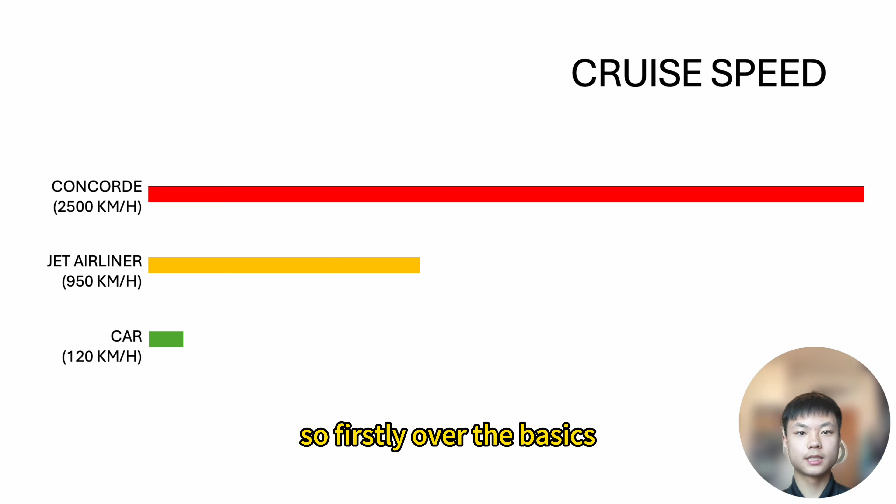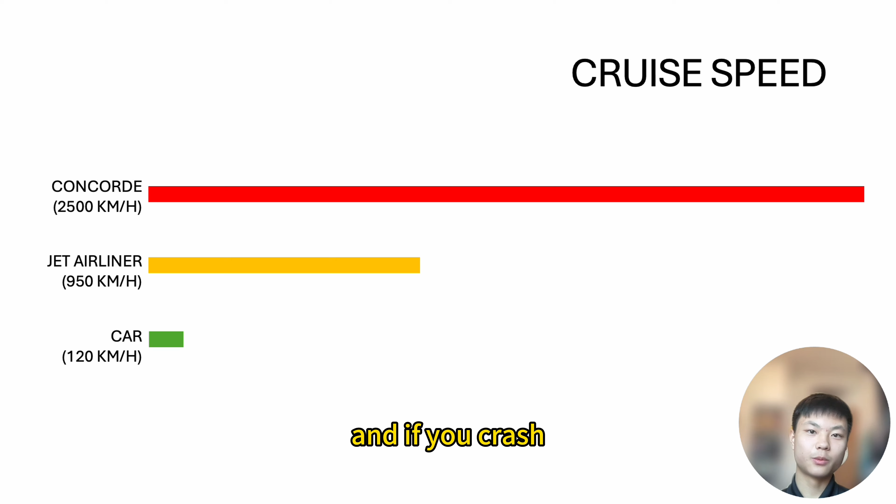So firstly, over the basics, aviation is inherently a bit more risky than ground transport, and that's mainly due to two reasons. First, it's just the speed. With cars, maybe you can go up to 120 kilometers per hour, but with most airliners, you can go up to 950, and for the Concorde, of course, 2500. And this just means significantly more kinetic energy, and if you crash, which is essentially losing all that kinetic energy, it is going to be significantly more catastrophic.

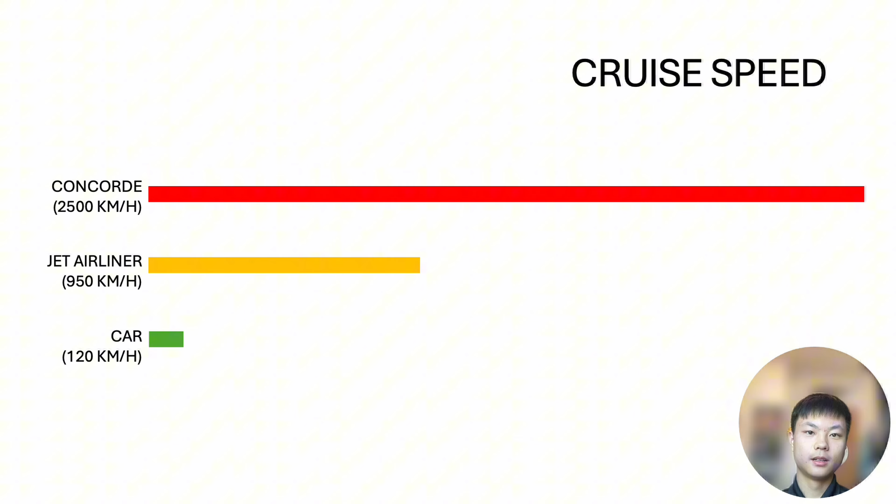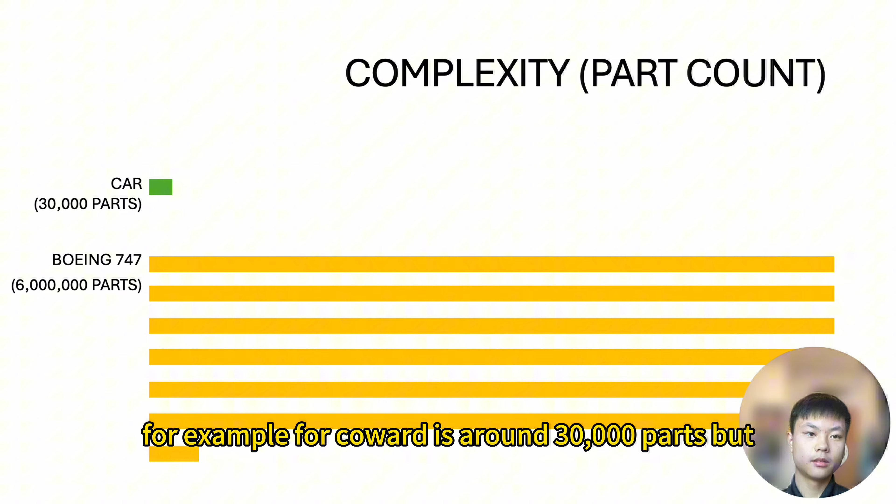Crashing at 120 kilometers per hour is very different from crashing at 950 kilometers per hour. Although this is a very, very big generalization, the idea is the same. At higher speeds, it's a bit more dangerous. And a more important part is the complexity of airliners and aircraft. For example, for a car, there's around 30,000 parts, but for the 747, there's 6 million and even more.

So, even though aviation components are significantly more tested and more redundant compared to car parts and components, there's simply more of them, and that means the potential of failure is significantly higher. That's why there are ETOPS requirements, and also why ETOPS was implemented in the first place, and also MEL, minimum equipment list, in aviation.

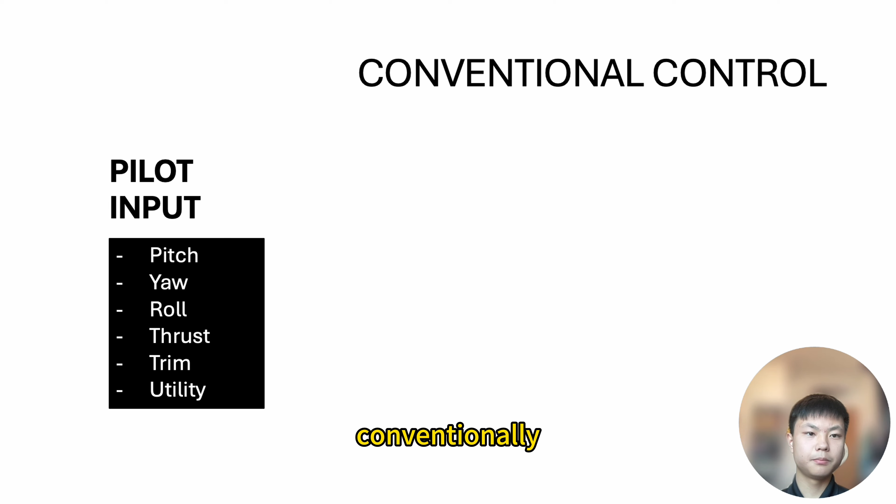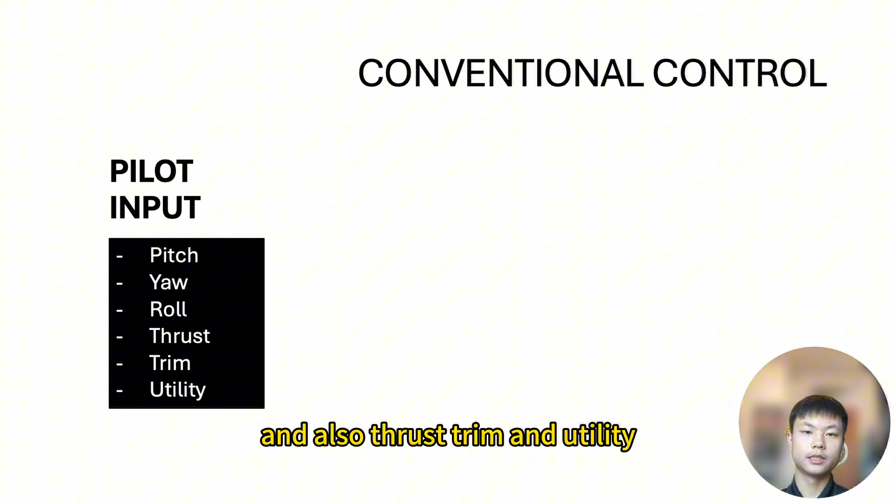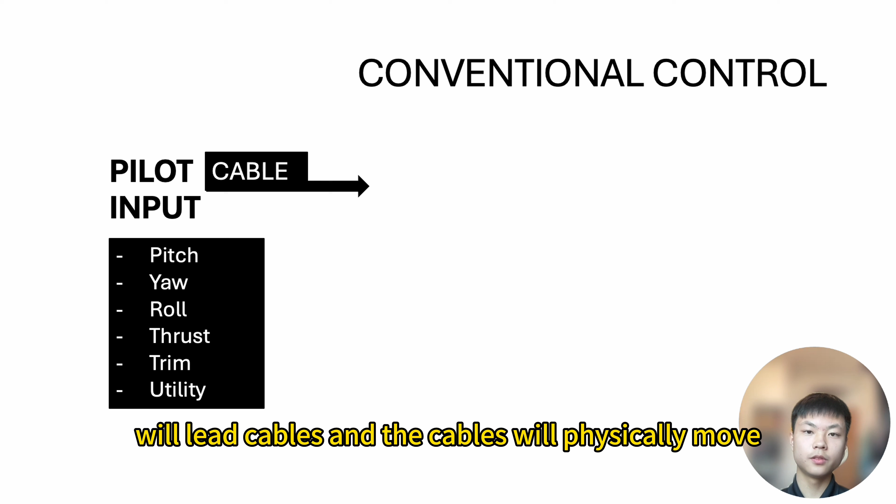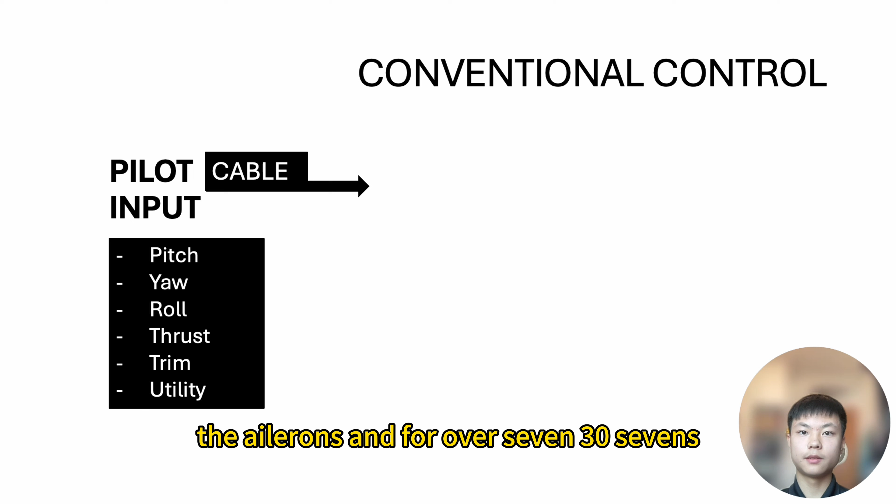This is the conventional way for pilots to provide control for the aircraft. The pilots will provide input, and that will be pitch, yaw, and roll with the stick and rudder, and also thrust, trim, and utility parts such as landing gear and flaps in other forms of levers or switches. And those things will lead to cables, and the cables will physically move. For example, if you go to the 737 landing gear bay, you can see all different types of cables that will move around when the pilots provide input, for the ailerons, and for older 737s, the spoilers and gear and all different types of hydraulic actuators and more. And this will lead to actuators.

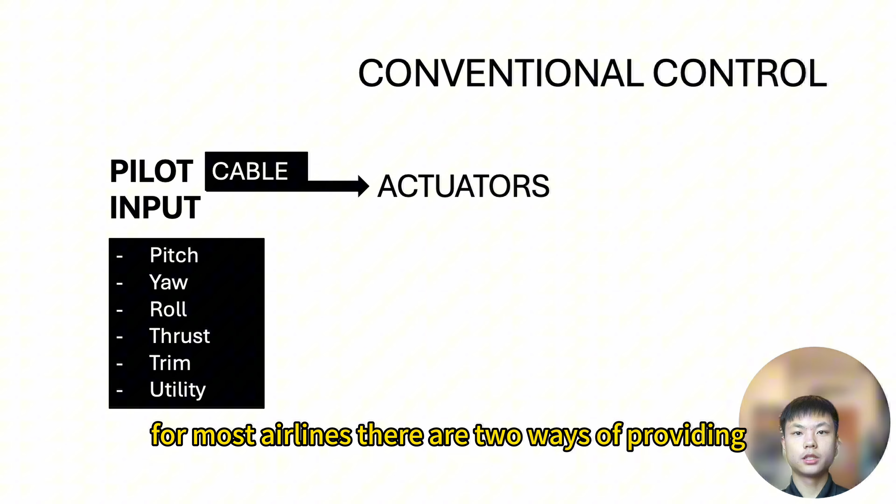For most airliners, there are two ways of providing controls with actuators. The first is just to rely fully on hydraulics. Most newer aircraft will rely fully on hydraulics, except the 737, which does have manual reversion, which I will talk about later. And with full hydraulic reliance, there's usually 3 sets of hydraulics, and the cables will control the hydraulic actuators, for example, for nose wheel steering, and that will lead to the response from flight control surfaces.

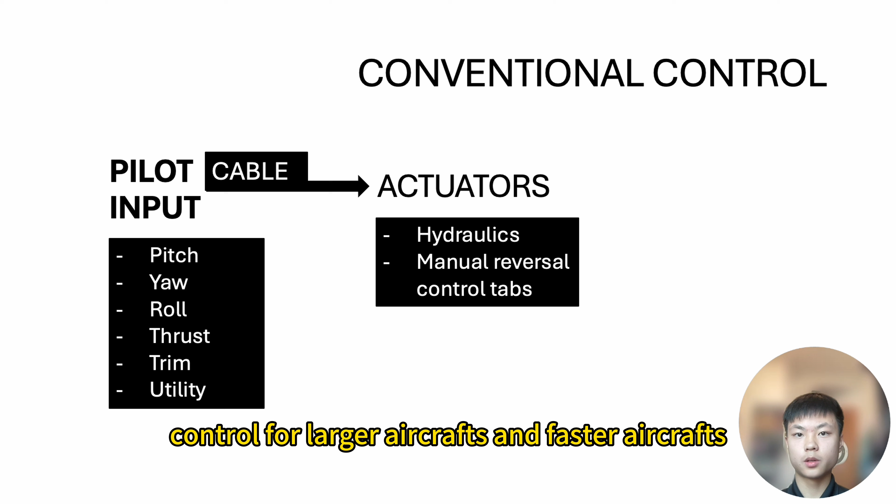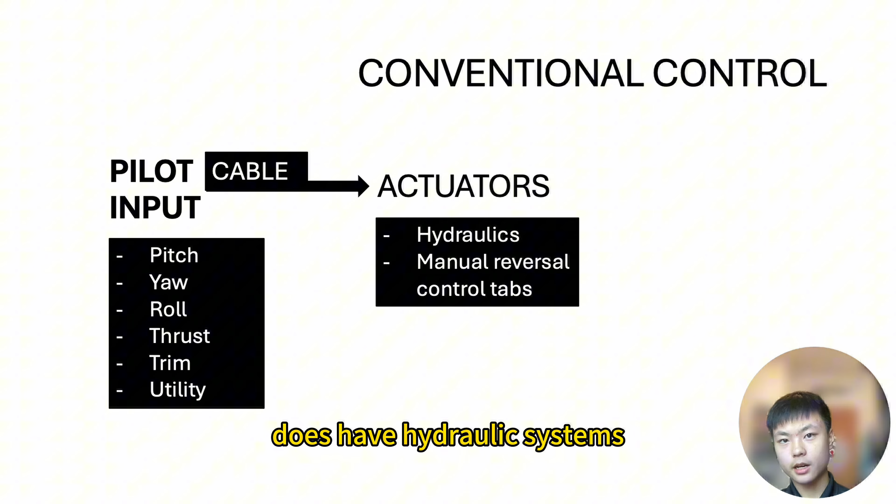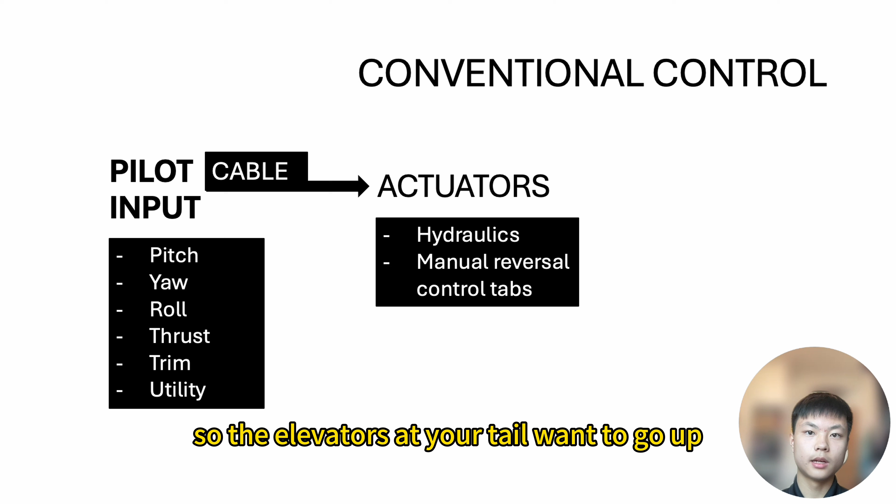Another way of providing control for larger and faster aircraft is by mixing hydraulics and manual reversion control tabs. One example of that is the DC-9, which does have hydraulic systems, but at other times, the pilots will also use the control tabs with manual reversion. Manual reversion is to implement control tabs on flight control surfaces that actually go the opposite way of your intended direction of the flight control surfaces. For example, you want to pitch up, so the elevators at your tail want to go up, but the control tabs will in fact point downwards.

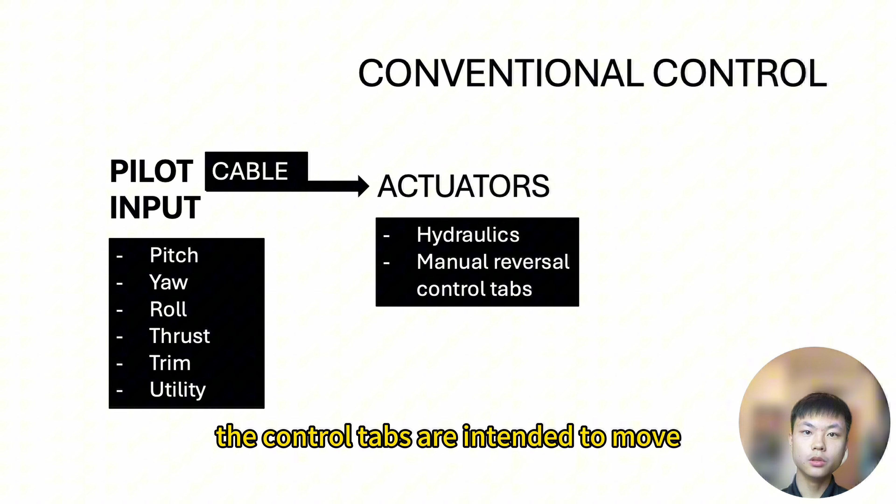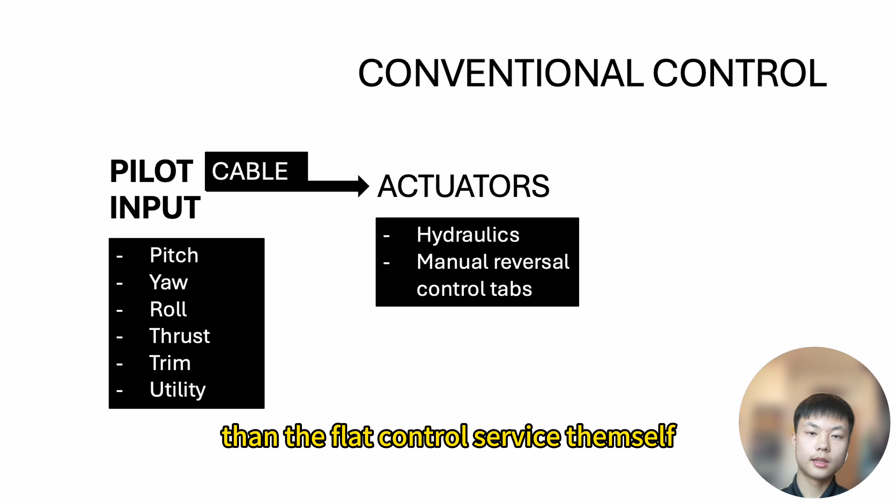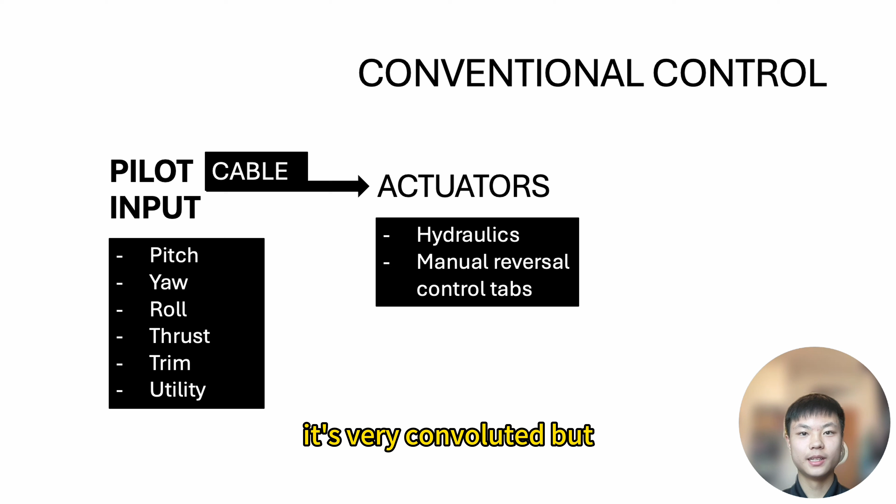Why is that? Because the control tabs are intended to move and drive the flight control surface to its intended position. Because the control tabs are pulling a higher AOA, angle of attack, than the flight control surface itself, it will actually move the flight control surface up for a pitch up movement, even though it's pointing down. It's very convoluted, but if you look at how the control tabs work on the 737 and also the DC-9, it will be very clear.

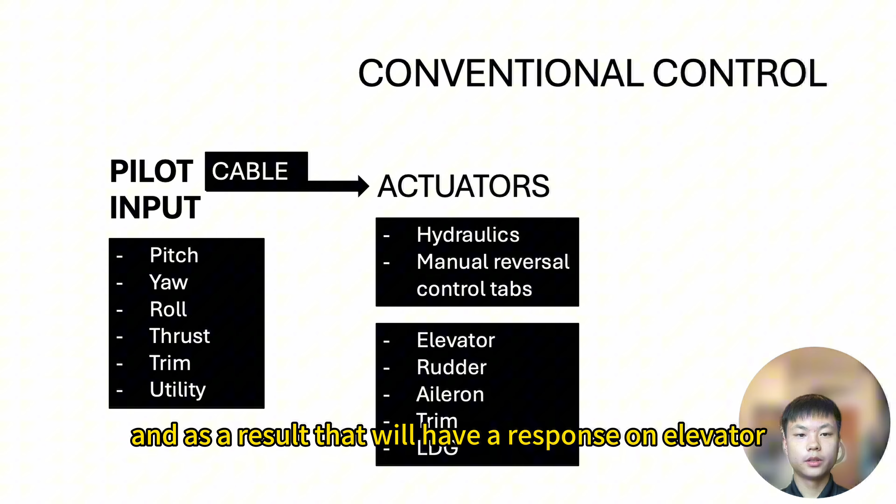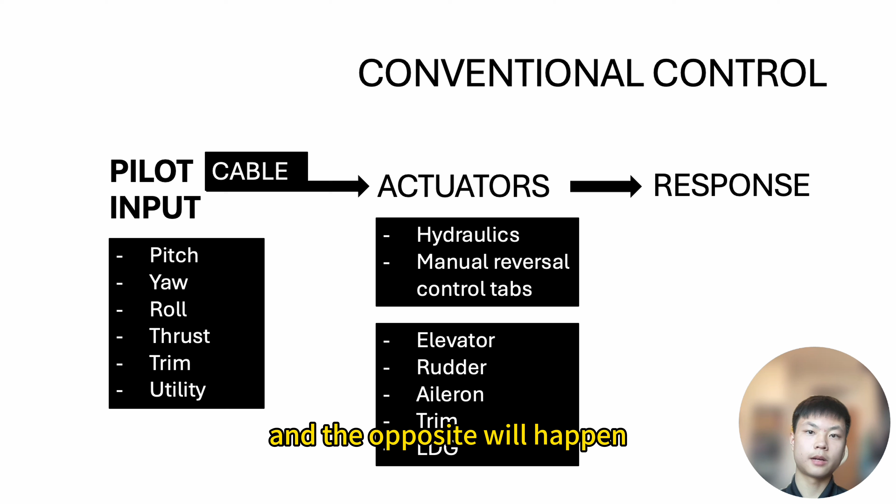And as a result, that will have a response on the elevator, rudder, and aileron, which are the primary 3 control surfaces for an aircraft, and also trim and landing gear actuation, potentially. And as a result, there will be a physical response of the aircraft. Your elevators go up at the back, then your nose will point up, and the opposite will happen, and your nose will point down. And this is an example of how the entire system works on the 737 MAX.

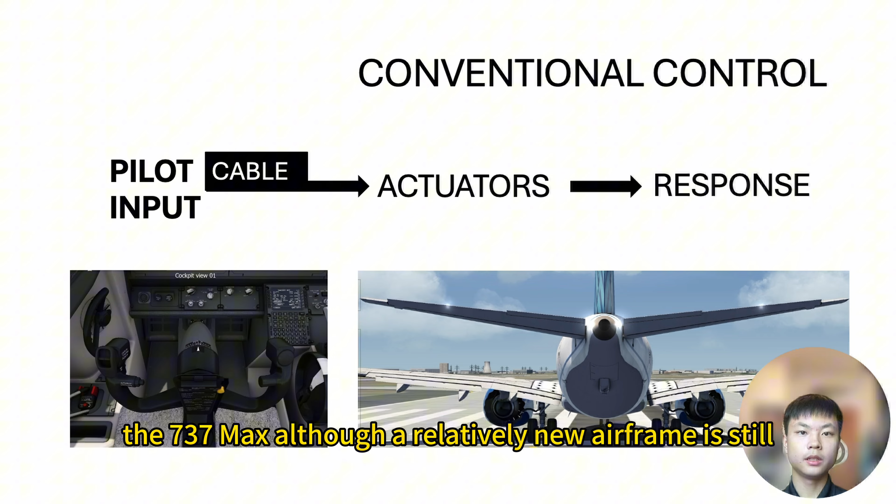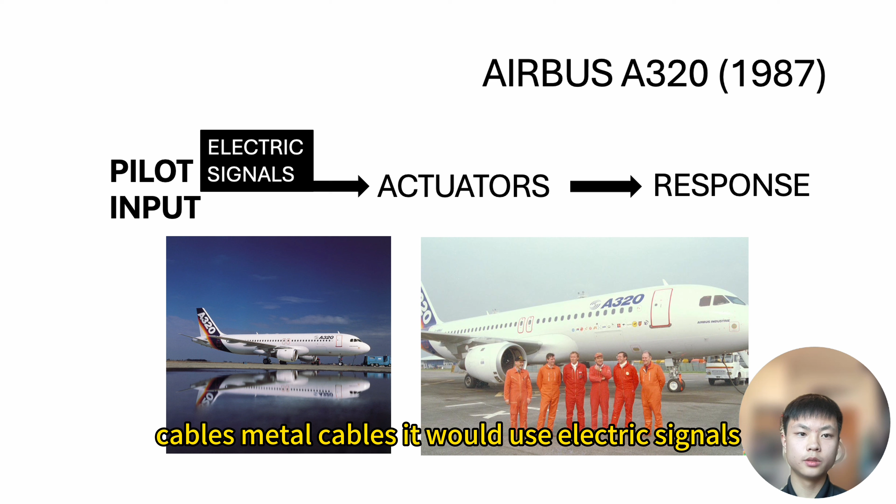The 737 MAX, although a relatively new airframe, is still mainly a conventionally controlled aircraft. It does have fly-by-wire spoilers, but that is not as significant compared to the A320, which was introduced in 1987 and in fact one of the first fully fly-by-wire aircraft in the world. Instead of using metal cables, it uses electric signals to drive those actuators. And this provides the opportunity to incorporate computer systems into the aircraft.

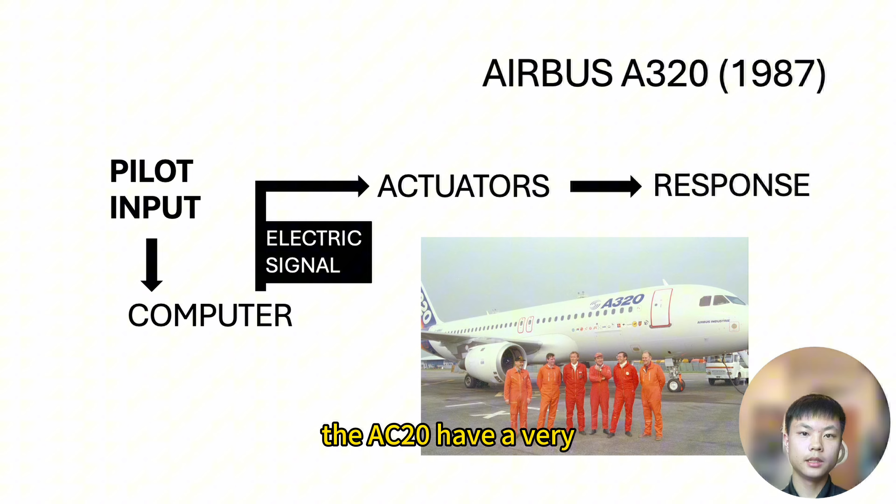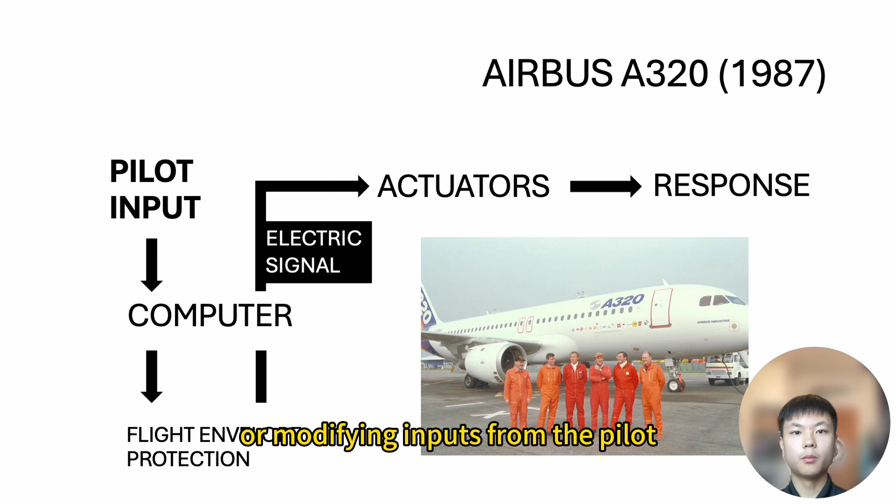And as a result, with the computers, the A320 has a very innovative feature for its time called flight envelope protection. Essentially, the computer can protect the aircraft by ignoring, amplifying or modifying inputs from the pilot. This can include pitch, yaw and roll, angle of attack, bank angle, speed, and others. For example, the pitch and angle of attack protection can reduce the chance of the aircraft getting into a stall.

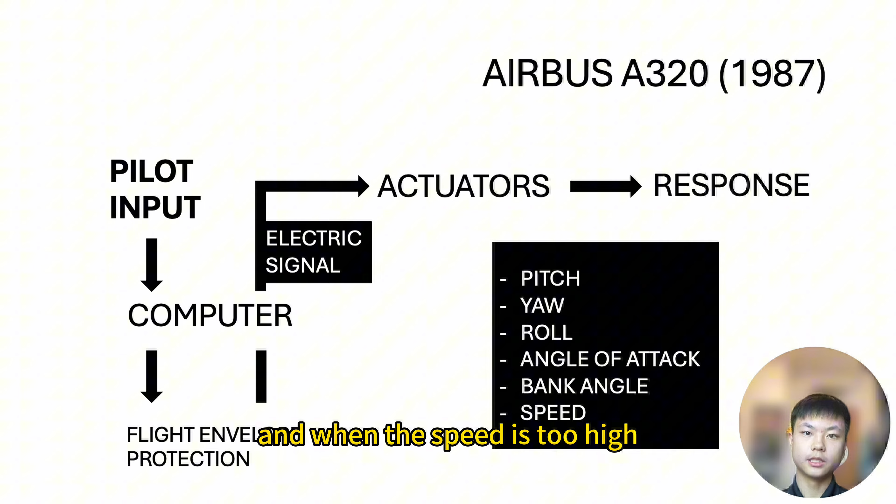And also speed. When the aircraft's airspeed is too low, there's a much higher chance of getting a stall. And when the speed is too high, firstly, there can be overload of the airframe itself, and also high-speed buffeting and Mach tuck, which is also a very big issue for aircraft control.

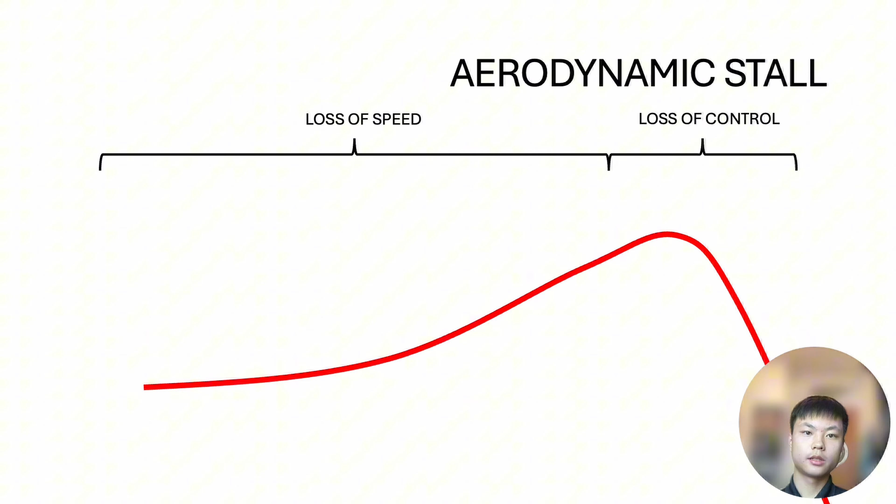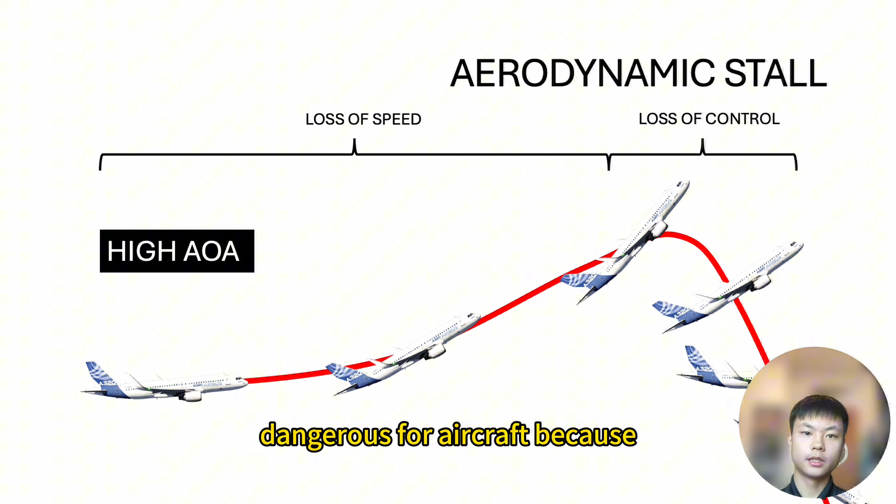To understand how the A320 battles the potential of stall, it's important to understand what a stall is in the first place. A stall is when the aircraft reaches or exceeds the critical angle of attack. Shown here, this is an illustration of how an aircraft will potentially stall. A stall is significantly dangerous for aircraft because your wings physically cannot generate enough lift for you to keep flying. There's too much disturbance behind it. On top of it, that differential of pressure is not enough.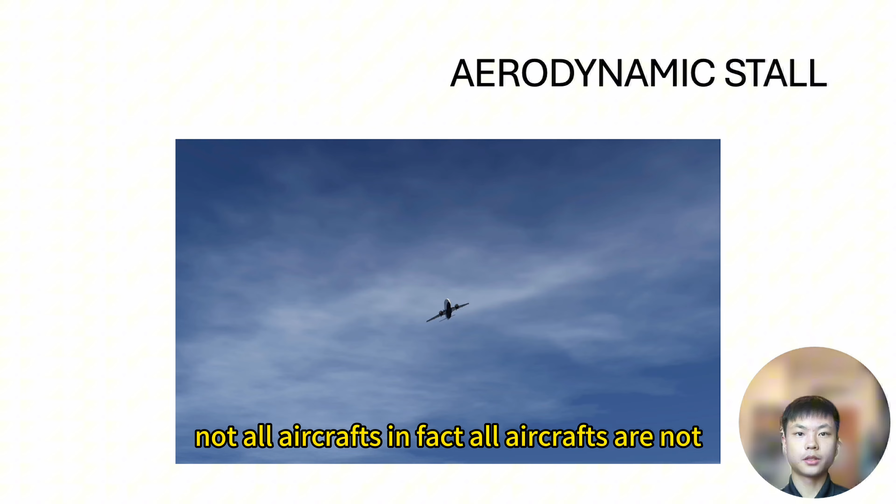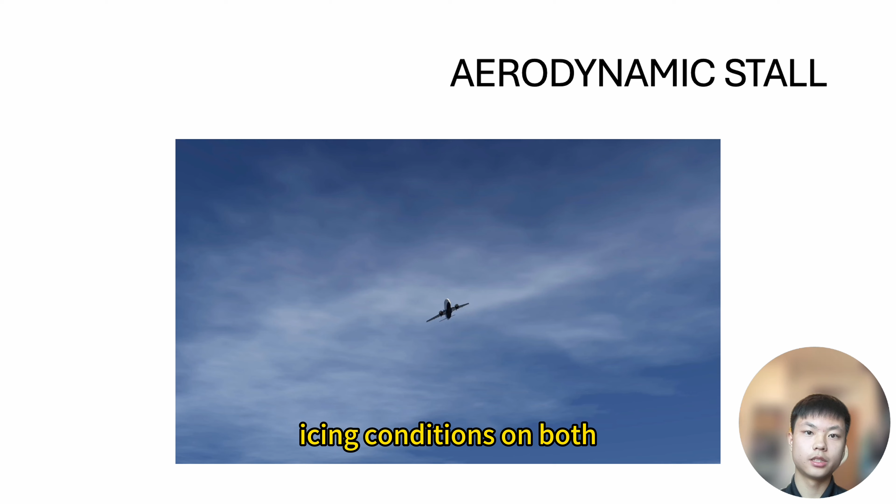And another issue that stall can cause is a spin. Because all aircraft are not exactly symmetrical and each wing can be slightly different. For example, for some aircraft, one wing may have a pitot tube and the other won't. And maybe there's slightly different icing conditions on both, potentially if the anti-ice is not used appropriately. Then the wings will stall at different angles of attack. So that means you can get into a very problematic spin.

And what's worse for an airliner is that stalls usually happen at lower speeds and lower altitudes. That means it's significantly more difficult to actually recover in time from a spin. So this is where alpha protection comes in on the A320 fly-by-wire. Alpha is short for AOA, which is short for angle of attack.

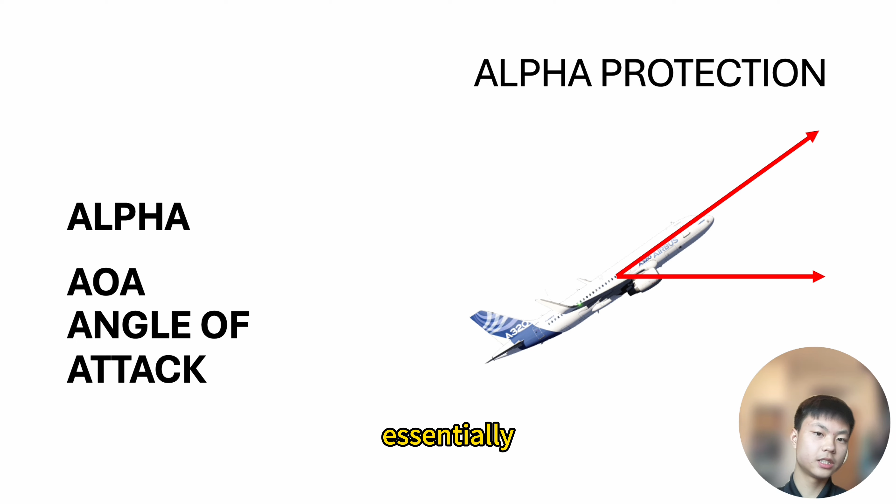And as I've mentioned, angle of attack is the difference between your aircraft's wing chord line and your direction of flight. Essentially, in simple words, the difference between where you're pointing and where you're going. When it goes too high, then you stall. You can look back at the illustration. During the stall, the plane is going almost perpendicular to the flight path. Although this is a very exaggerated graph, it is still possible to have potentially 90 degrees or even more AOA for an aircraft.

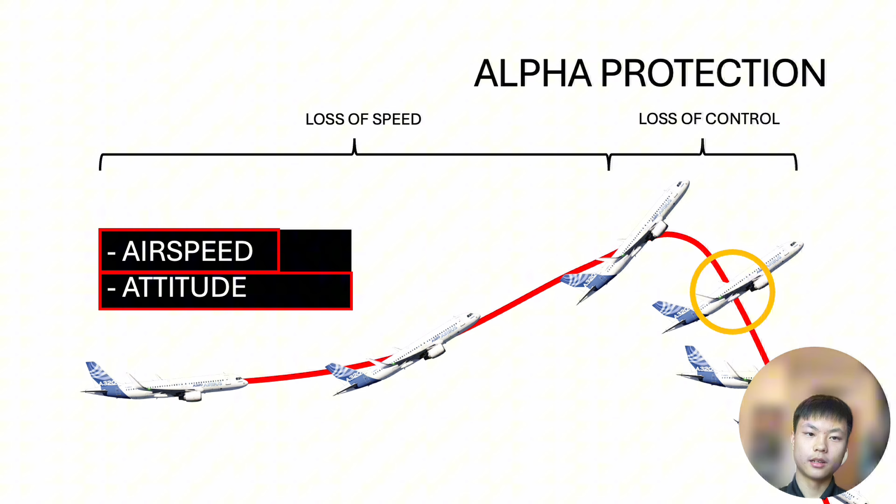There are two main elements that lead to the AOA: the first is airspeed and the second is attitude. When airspeed is low, to maintain the same altitude, you will require higher AOA. And the attitude will also pretty much directly affect the angle of attack, because when the attitude is high, the angle between your chord line and your flight path is just higher.

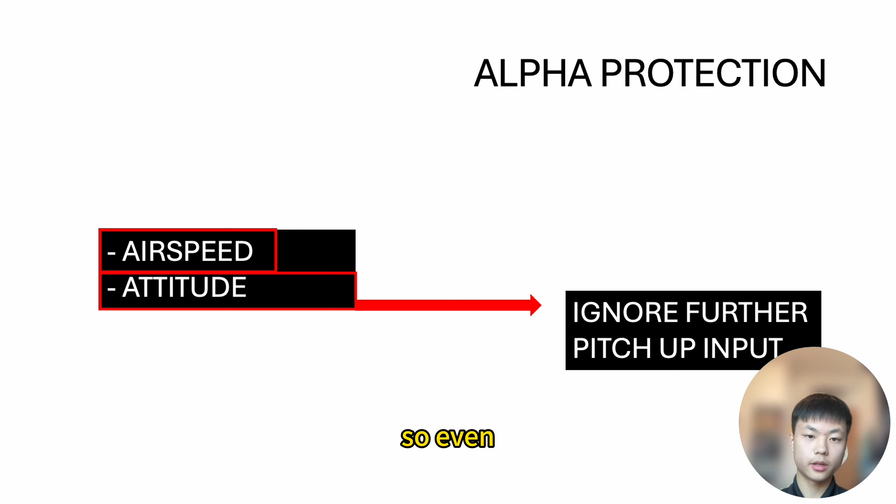So the way the alpha protection works is to firstly restrict the attitude. When the aircraft is sensing a stall, it will ignore any further pitch up input from the pilot, or even provide a little bit of its own pitch down input to avoid reaching or exceeding the critical angle of attack.

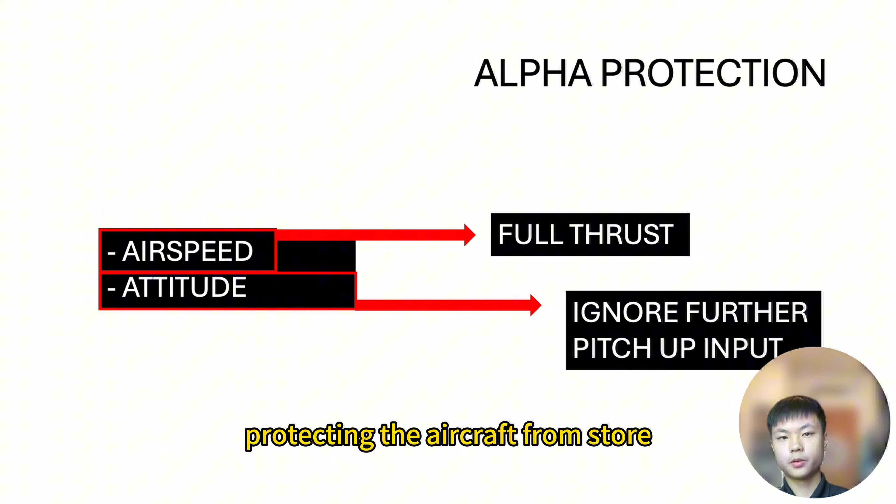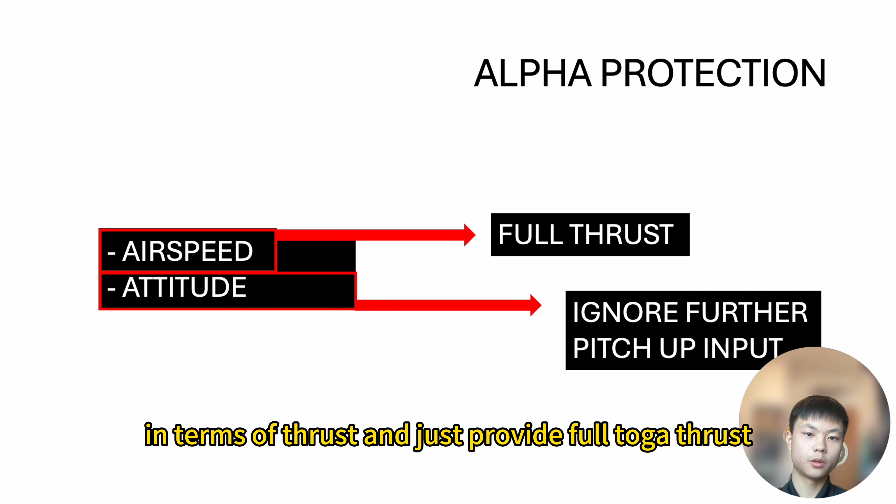And another way of protecting the aircraft from stall is called alpha floor, which is when the aircraft goes very close to a stall, it will automatically ignore all the pilot's input in terms of thrust and just provide full TOGA thrust on the engines. This can significantly reduce the chance and even eliminate the possibility of getting into a stall in an A320.

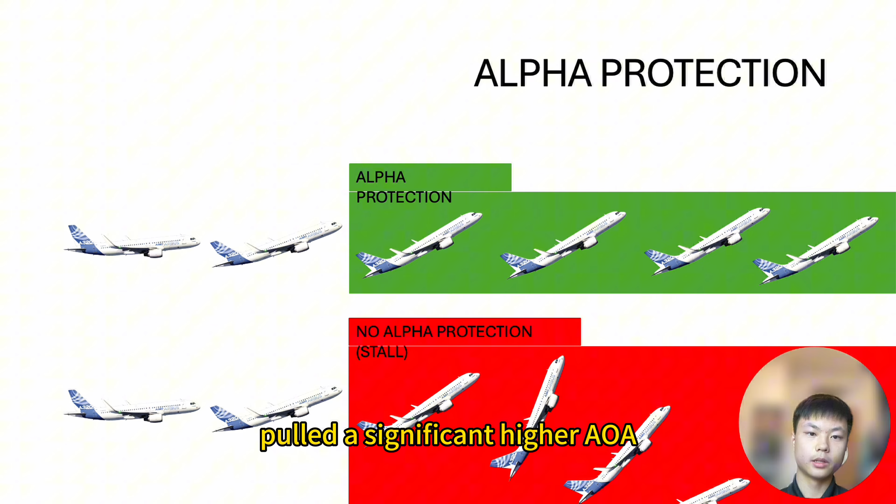This is an illustration of the difference between an aircraft with alpha protection and one without. You can see the first one in green will limit its pitch and also provide potentially higher thrust, so it can maintain its attitude and altitude without getting to a stall and doesn't reach the critical angle of attack. The second aircraft in red does not do that, and not only does it not provide extra thrust, it also pulled a significantly higher AOA. As a result, it stalls.

Another feature of the Airbus fly-by-wire is bank angle protection. Essentially, this is a bit easier to understand. When you're flying straight and level, all the lift is supporting the aircraft upwards. There is the most upwards lift for the aircraft. Once you get into the bank, there's two issues. First of all, the lift gets split into two different directions, horizontally and vertically; some of it will bleed for the turn. So that's the first thing.

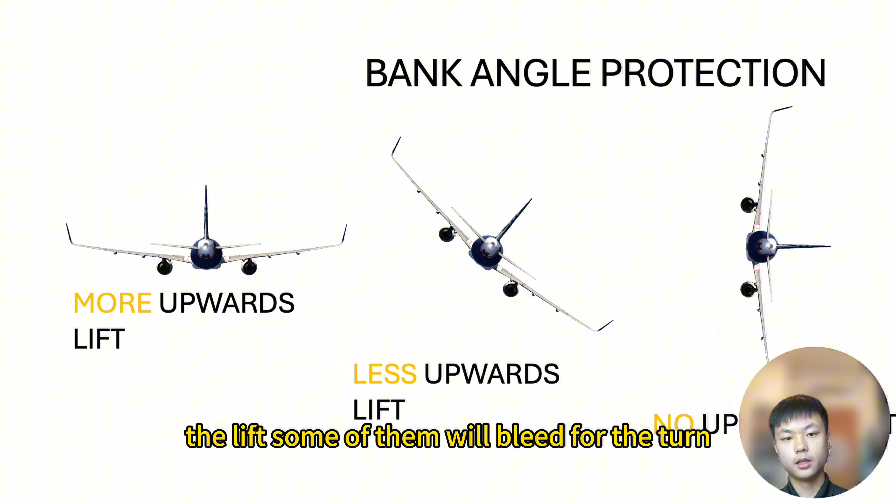You need to pull a higher angle of attack to maintain altitude during a turn, during a bank. But the issue is that during a bank, your critical angle of attack is also lower. So this will push you into a corner that is a bit less flexible than flying straight and level. And when your bank angle is too high, this corner gets smaller and smaller, and it's very easy to get into a stall or lose significant altitude.

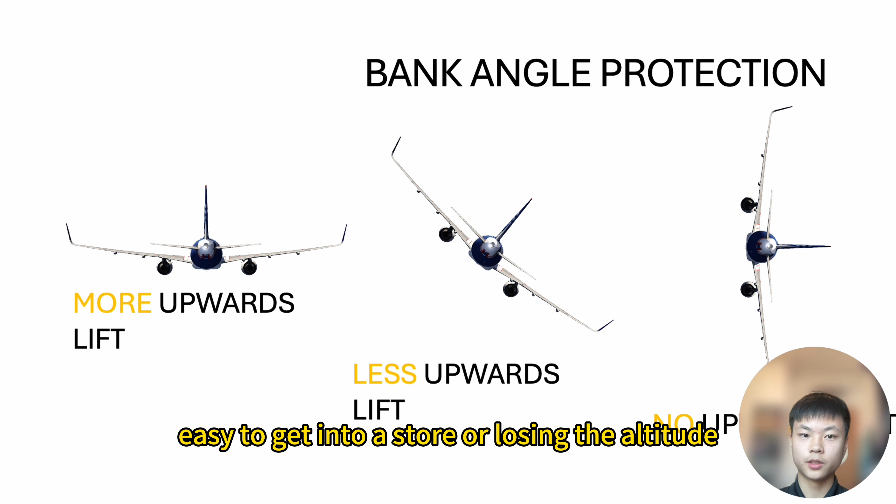As a result, the bank angle protection in the flight envelope protection on the A320 does two things. Firstly, it will ignore any further input from the pilots once they reach 67 degrees. It will limit the aircraft to 67 degrees of bank. That's the most it can go without getting too risky.

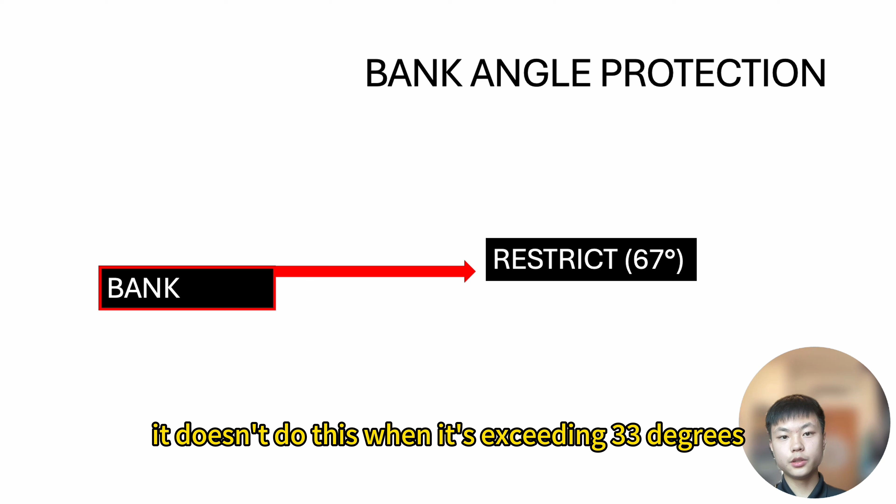And also, although the A320 fly-by-wire works very much like CWS, control wheel steering, on a 737, where it will keep the aircraft's attitude, it doesn't do this when exceeding 33 degrees. Once the pilots stop putting extra control, the aircraft will automatically provide some aileron and spoiler input to return the aircraft to 33 degrees. That's the maximum it can maintain for a longer duration.

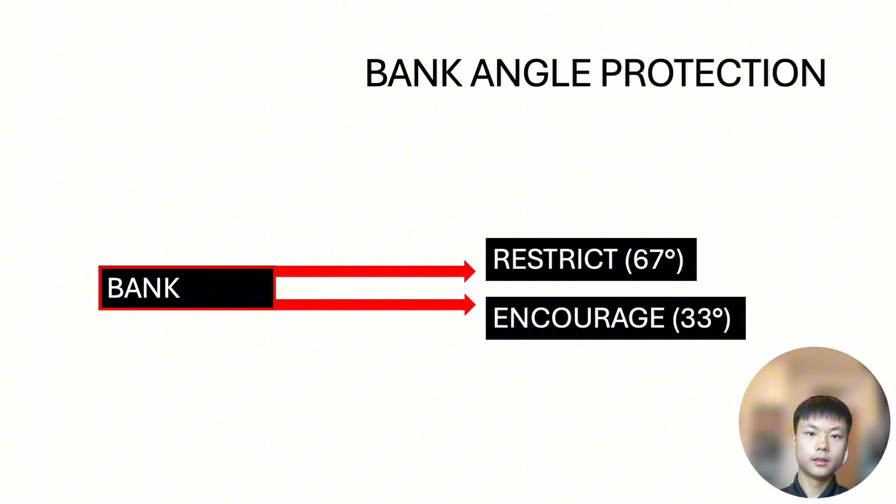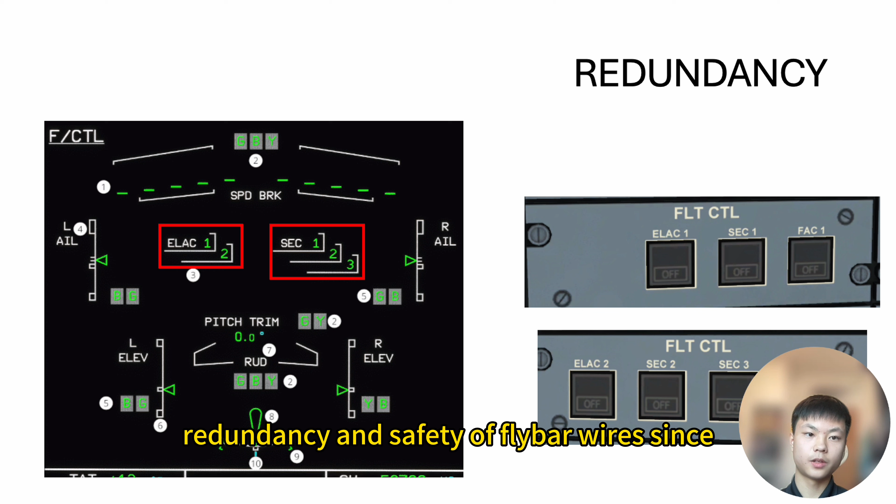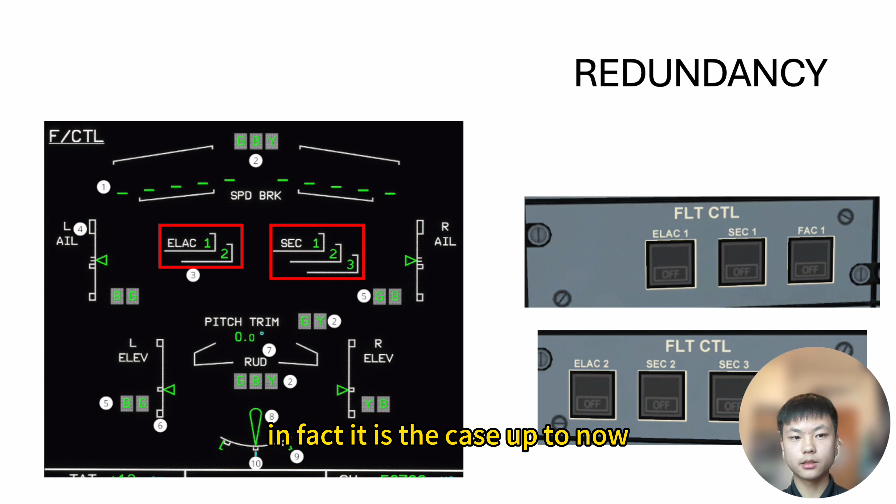Of course, in 1987, when the A320 first came out, there was quite a lot of criticism for the redundancy and safety of fly-by-wire, since it's completely relying on the computers. So there is a very comprehensive list of redundancy systems for the A320, and in fact, it is the case up to today, with all the newer aircraft also maintaining similar or even better forms of redundancy for their systems.

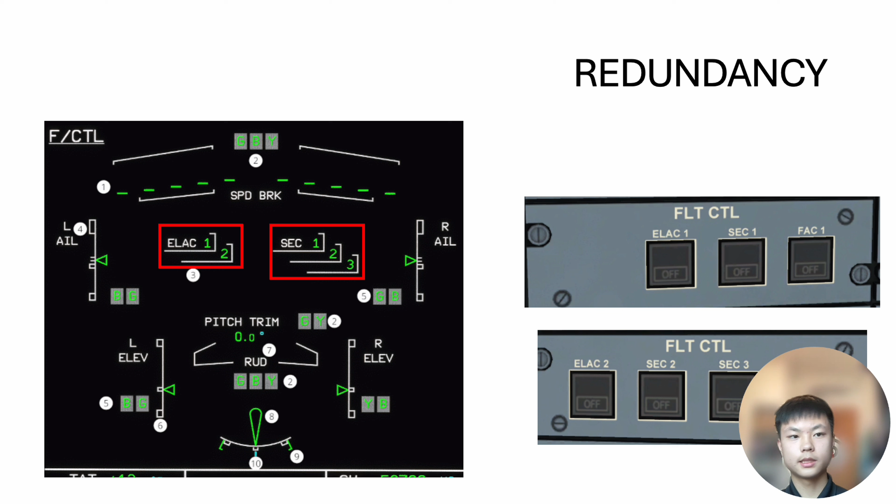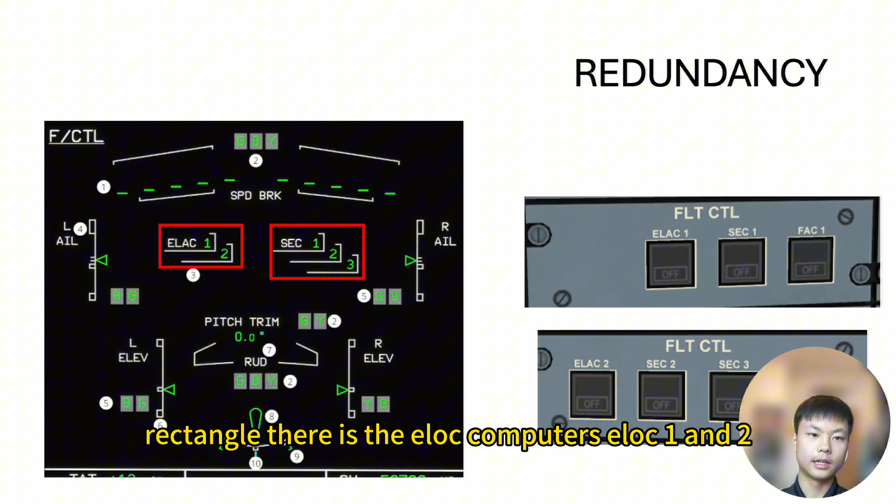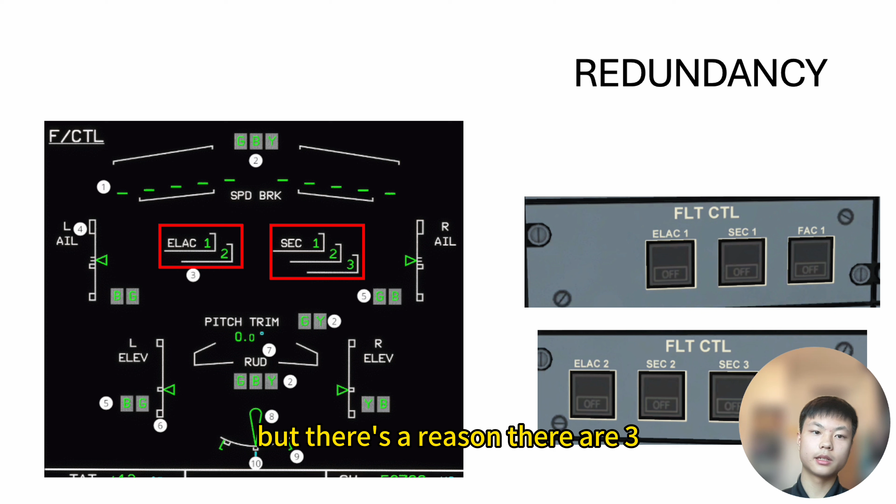On the left of the PowerPoint, there is a screenshot from the A320's flight control status page on the A320's cockpit screen. And on the left rectangle, there are the ELAC computers, ELAC 1 and 2. Those are the ones that will control the ailerons and elevators normally. And on the right, there are SEC 1, 2, and 3. Those are used to control speed brakes and spoilers. But there's a reason there are 3 SECs, and I will explain later.

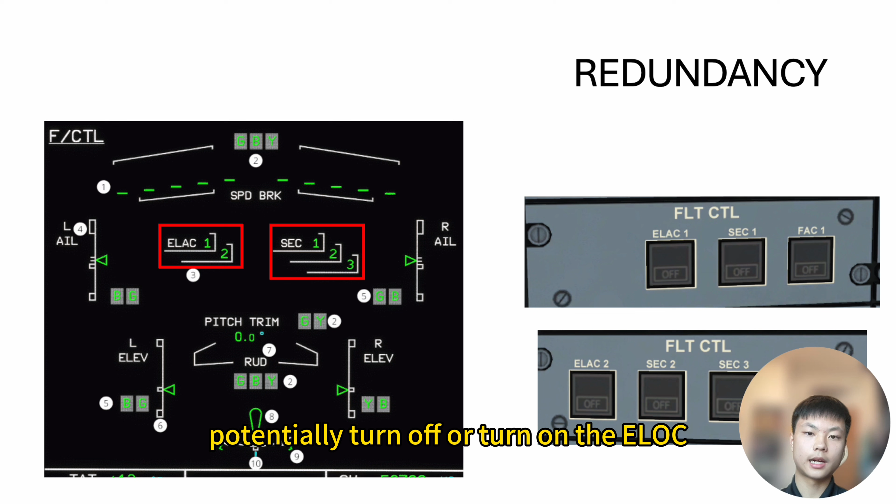On the right, there are 2 pictures, and those 2 are just the overhead panel where the pilots can potentially turn off or turn on the ELAC, SEC, and also FAC computers. Although I will not dive too much into FAC, because FAC is mainly for the rudder, and also used to calculate the critical angle of attack. Although it's important and also a factor within the fly-by-wire system, it's not significantly crucial for the basic flight.

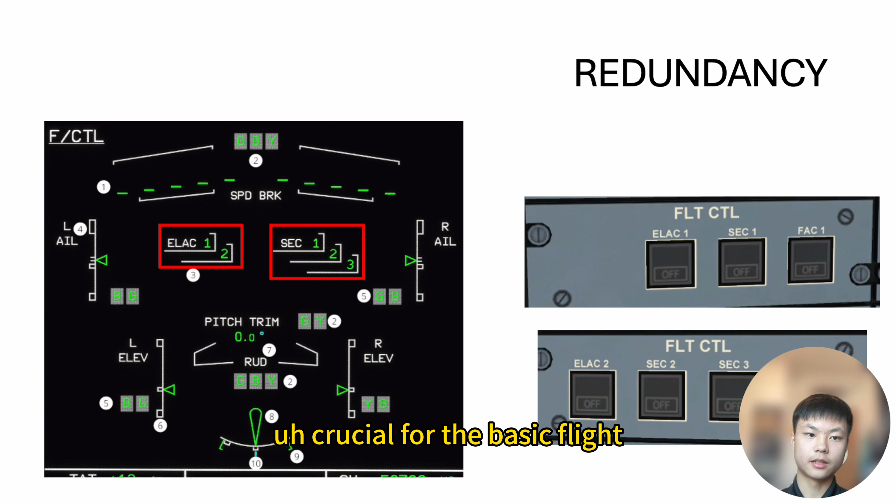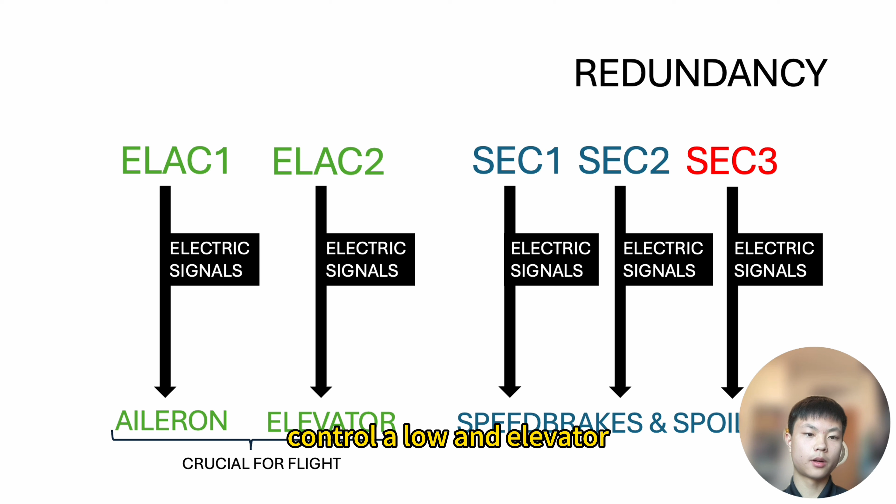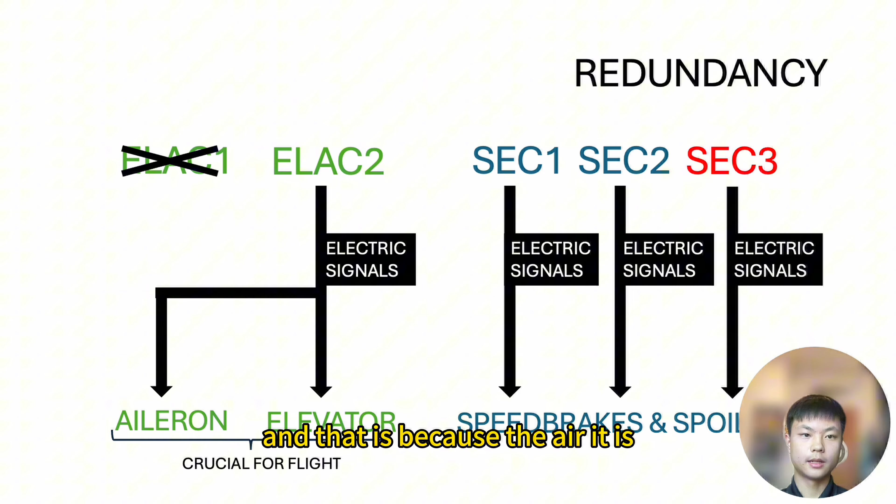So here is a graph of how the ELACs will control the aircraft. So normally ELAC 1 and ELAC 2 will just control aileron and elevator, as they should. And SEC 1, 2, and 3 will just control the speed brakes and spoilers. But if, for example, ELAC 1 fails or loses electric power, then ELAC 2 will be used to control both aileron and elevator. Those computers are all able to multitask for different roles. And at this point, the aircraft control will be slightly degraded with potentially a bit less actuation or less speed brakes and spoiler usage. And that is because it's asking one computer to do 2 computers' job.

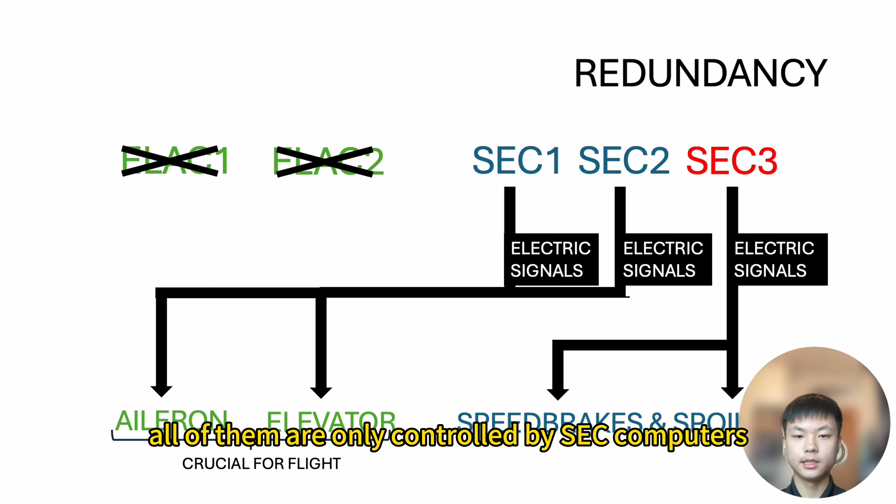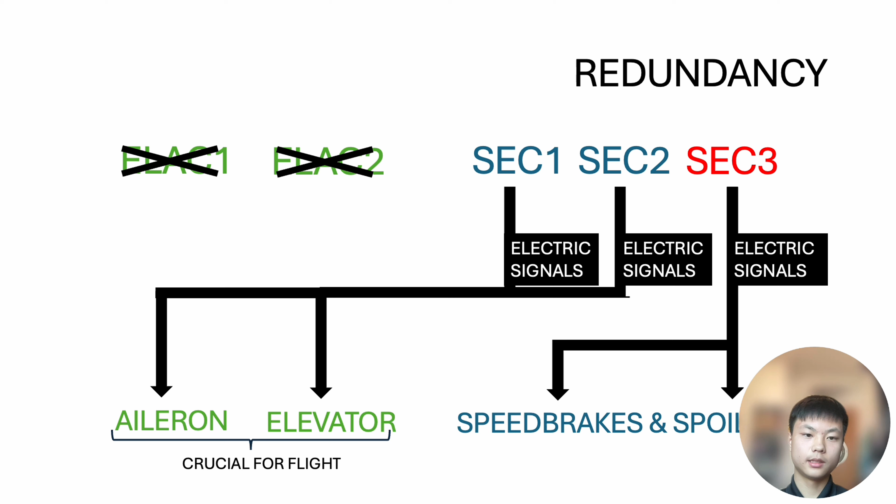And if both ELACs fail, then the SEC computers are capable of multitasking and switch over to control aileron and elevators. At this point, the aircraft's control will be significantly restricted, because although aileron and elevator are still functional, the speed brakes are all only controlled by SEC computers, and SEC 3 is only one computer and it's doing 3 computers' job. So as a result, usually at this point, there will be essentially half or even less speed brakes or spoilers operational. But at the very least, the aircraft will still be able to be controlled. It's not an uncontrolled flight.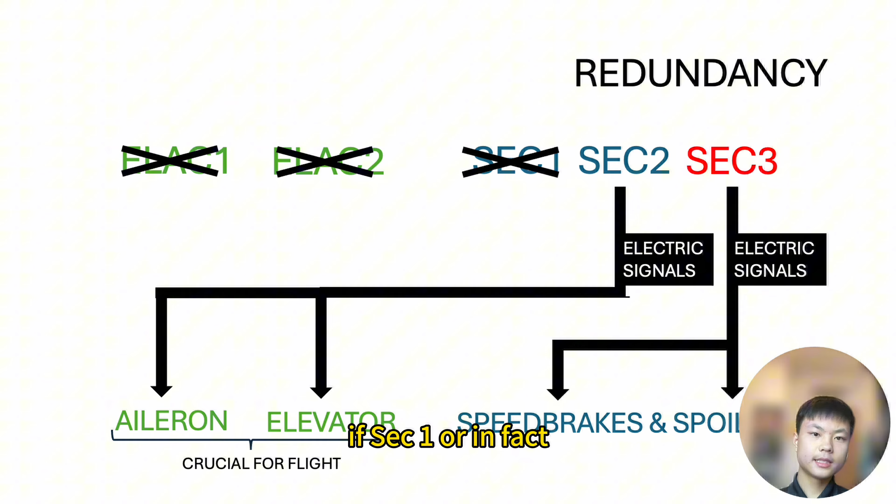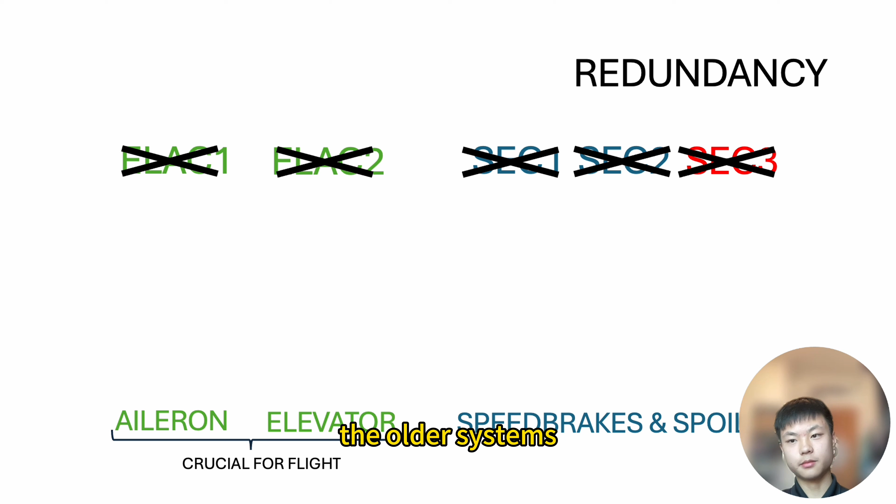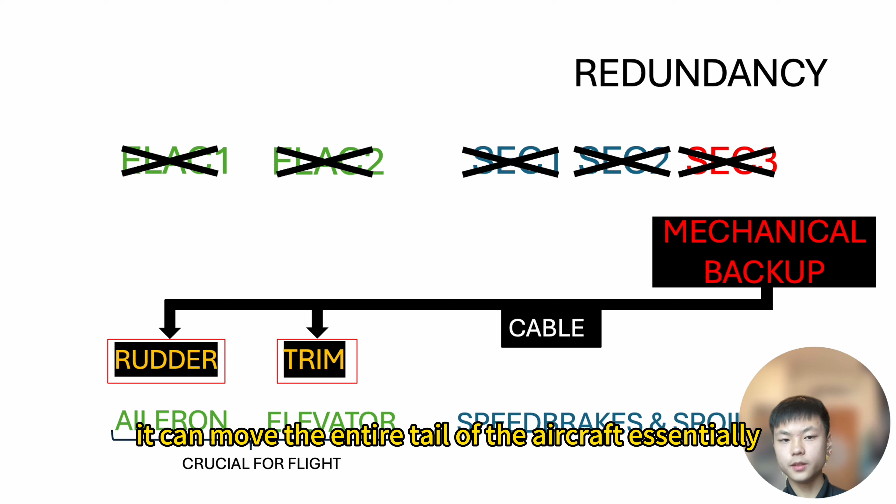If SEC 1, or in fact, if everything fails, if all computers fail on the aircraft, say there's an electric failure, then Airbus has incorporated the older systems, the cables, back into the equation. There is a mode in the Airbus A320 called mechanical backup, where the rudder and trim in the cockpit are connected to the cables. And this can provide a very simple but also very sluggish way of controlling the aircraft. Firstly, trim. Trim is just the trimmable horizontal stabilizer at the back of the aircraft. It can move the entire tail of the aircraft essentially, and that will provide a little bit of nose authority. It's a lot more sluggish and a lot slower to actuate, but it can maintain normal flight.

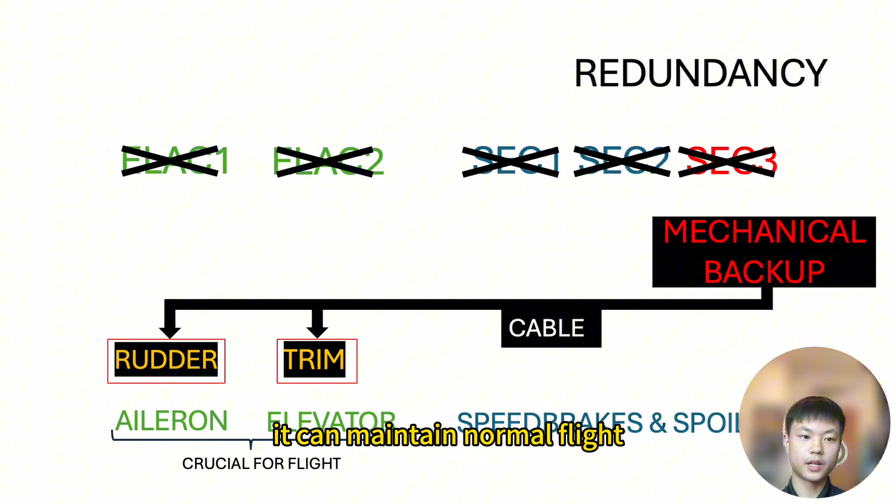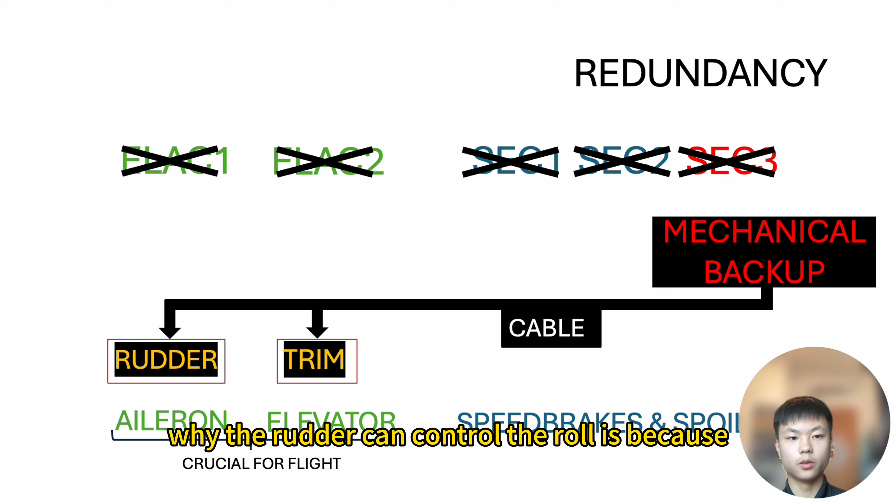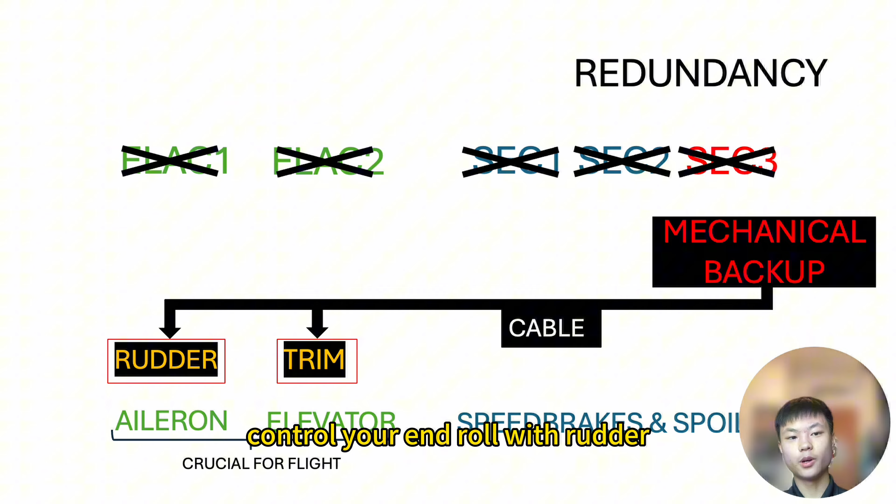And then secondly, there's rudder. Rudder on the A320 is, like most aircraft, offset from the center of mass. As a result, when you actuate the rudder, not only can you create a side slip, you can also allow the aircraft to actually roll a little bit. More importantly, why the rudder can control the roll is because during the side slip, one wing will have a higher airspeed than the other, and the wing with higher airspeed will have more lift, and that means the wing will be raised. So it is still possible to control yaw and roll with rudder during mechanical backup.

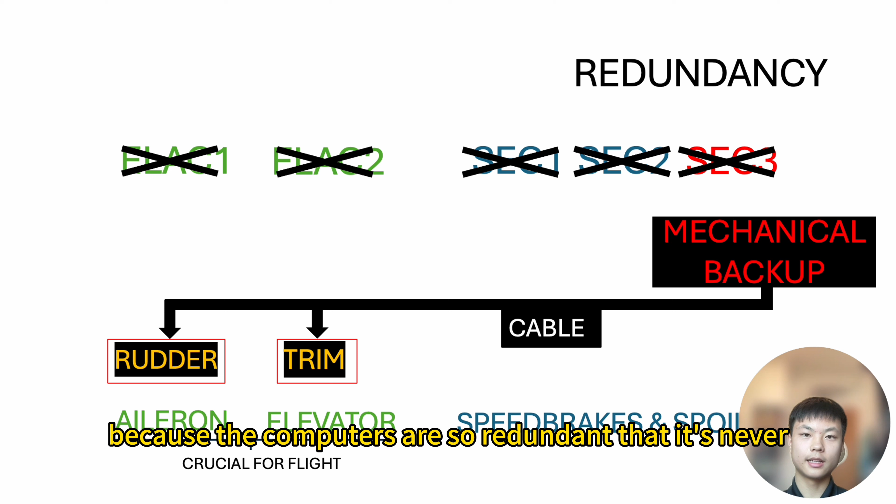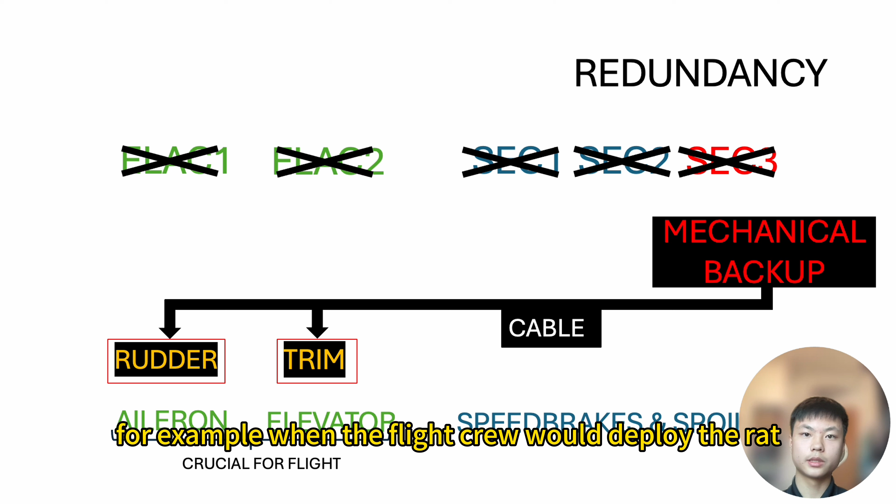That means it's technically possible to land an aircraft with mechanical backup, although it's never intended to, because the computers are so redundant that it's never designed to have all of them fail, and mechanical backup is just used for potentially temporary control of the aircraft when, for example, the flight crew deploys the RAT, which during that time may not provide as much electrical power.

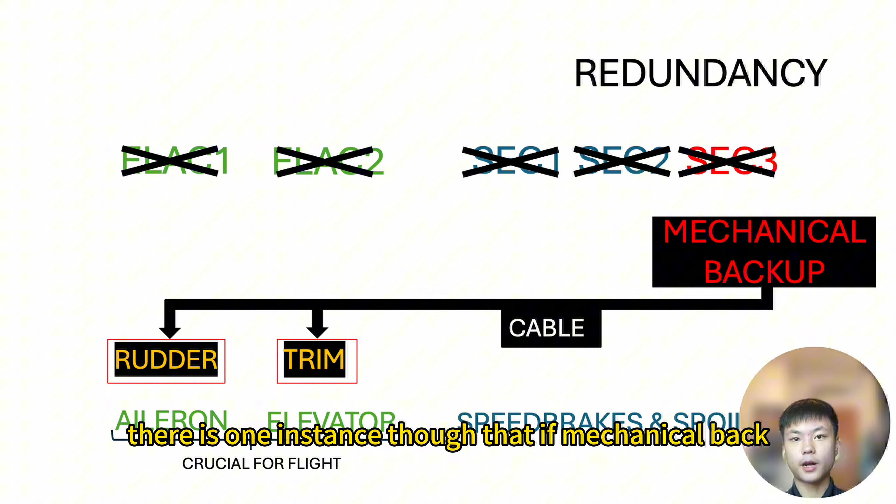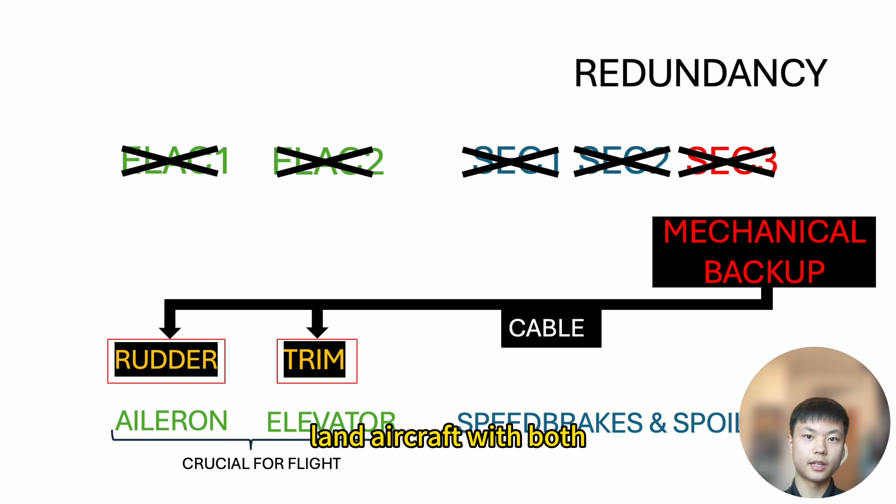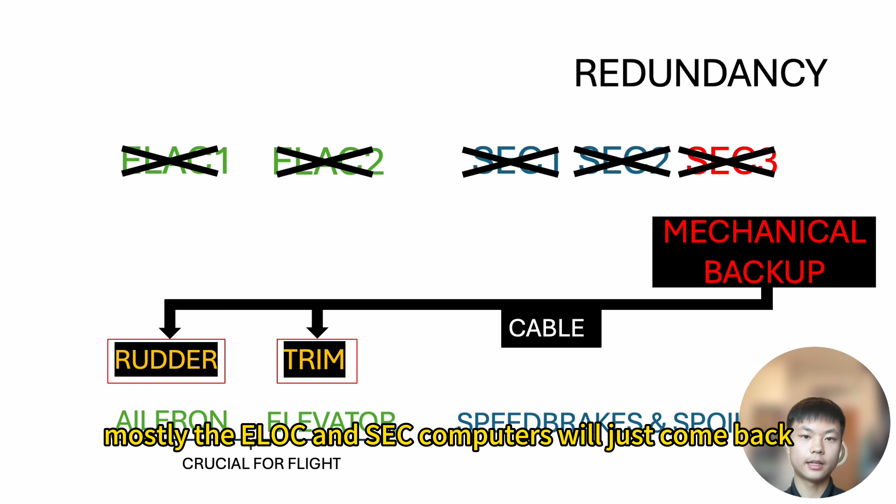There is one instance though where the mechanical backup was actually used to land the aircraft, and that is during a SmartLynx line training flight for its pilots, and it's fortunate that they managed to land the aircraft with both engines failed and mechanical backup. And after that, there are no other cases that I know of that have utilized mechanical backup as a last resort. Mostly the ELAC and SEC computers will just come back because of either redundancies or just electrical power resuming, and there's no need for mechanical backup usage.